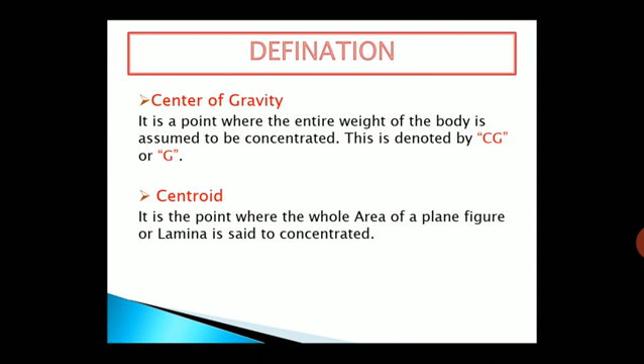So let's come to the axis of symmetry. In case of symmetrical figures like rectangle, square or circle, the figure can be divided into exactly equal portions along the axis, which is known as axis of symmetry. Yes, this is the axis which divides the figure into exact equal parts.

For example, if we take a rectangular paper and we want to cut the paper into two parts, what do we do? We fold it, and at the fold we cut that paper. So in this case the fold which we have made is nothing but the axis of symmetry, because along that fold when we cut we have two parts of the paper.

Secondly, I'll take a common example of a lemon. If we want to cut a lemon in the kitchen, we cut it such that we get two equal halves of the lemon. So the axis along which we are cutting is nothing but the axis of symmetry. So we can get two types of figures. One is which we have symmetry along both the axes.

Example, if I take a circle and draw a horizontal diameter, the diameter becomes a symmetrical axis, because if I cut along the diameter, I'll get two equal parts. Similarly, if I consider the vertical diameter as a symmetrical axis and cut along the vertical, again the circle is divided into two equal parts. So this is a completely symmetrical figure where along both the axes when we cut the figure, it results in equal halves.

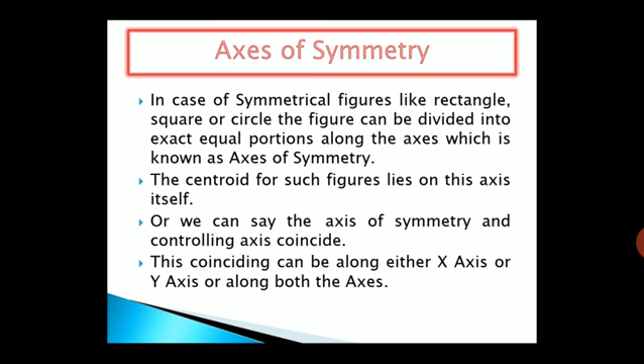Next comes the centroidal axis. It is that axis which passes through the centroid or center of gravity of the figure. Now for symmetrical figures, the centroidal axis and the axis of symmetry overlap because both are the same.

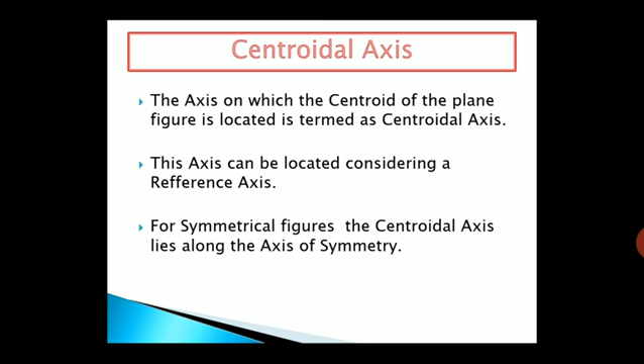Next is axis of reference. It is any general axis or standard axis which is taken as reference. Now we have our x-axis and y-axis which we use commonly while drawing a graph. They are reference axes. With respect to them, we can locate the centroid or center of gravity of a figure.

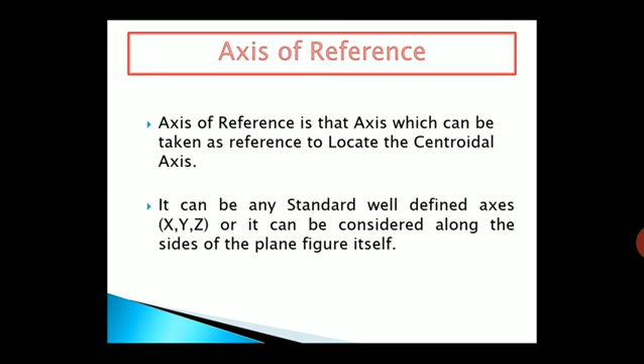Now this sketch here which I have put is just an example where we can recognize the different axes. Now your x and y axis are your standard axis, which are your axis of reference. Now CG, which is marked and shown in green color, is your centroidal axis.

Now the figure taken is rectangle in shape. That means it's a symmetrical figure about both vertical as well as horizontal axis. Hence, in this case, the axis of symmetry coincides with the centroidal axis. Okay, that means that both are same.

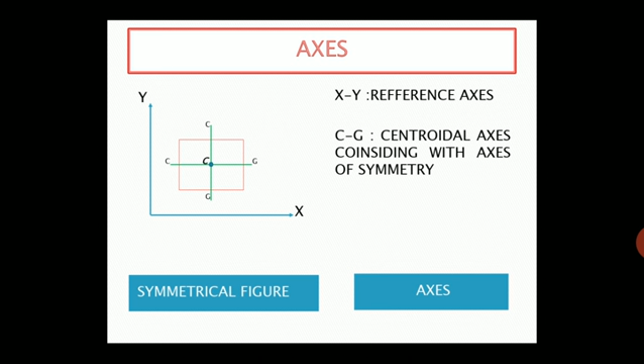So here if we want to locate the center of gravity, that is the C point which is shown on the figure, you can locate it with respect to x-axis, that is finding the vertical distance, which we term as y bar, or you can locate it with respect to y-axis also by finding the horizontal distance, which we term as x bar. So basically the coordinates of your centroid are x bar and y bar. Okay, so that is what we need to find in this chapter, locating CG of the given figures.

So now let's come to the formula by which we can locate the CG. For symmetrical figures it is very easy because the center itself is the CG. But when we have unsymmetrical figures or plane laminas, how can we locate the CG? This derivation will give you the idea for it.

Now let us consider a body which is having a total area capital A. Let x bar and y bar be the coordinates of the CG of the entire body. Okay, clear? Now let us divide that body into small elements, each of area say A1, A2, A3, so on up to An, such that their centroidal distances from the axis are x1, x2, x3, so on up to xn, and y1, y2, y3, so on up to yn.

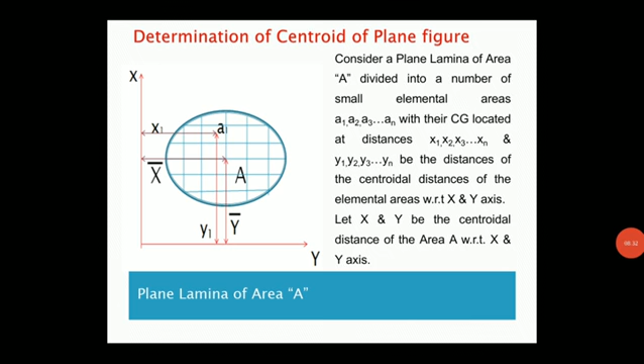That means the entire area A is divided into small elemental areas A1, A2, A3, such that if we add all the small elemental areas, we'll get the same area, capital A. Now, in this case, our task is to find x bar and y bar. So, applying the theorem of moments about y-axis and x-axis, we get A into x bar is equal to A1x1 plus A2x2 plus A3x3, so on up to Anxn.

Now what is this theorem of moments for an area? A is the entire area, whereas x bar is the centroidal distance of the entire area. So it can be written as what? We'll take an individual element and multiply it with the x value for that particular element. And when we do the summation of all that, the equation which we get is A into x bar, that is the total area multiplied by the centroidal distance, is equal to an individual area multiplied by its centroidal distance, and summation of such gives us x bar.

So in the below formula, if we cross multiply, summation of Ax is nothing but A1x1, A2x2, so on. A is shifted to the right hand side, it goes to the denominator, and we get the formula for x bar as summation of Ax divided by A, where summation of Ax is A1x1 plus A2x2 plus A3x3 and so on, whereas capital A is the summation of entire area or the total area.

Similarly, we'll get y bar as A into y bar is equal to summation of Ay, that is A1y1 plus A2y2 plus A3y3 so on, divided by A, which is the total area. Or if you want to write it in the form of integration, which we require to use during our derivations, we can write integration of x dA upon A is x bar, whereas integration of y dA upon A is y bar. Here what is dA? dA is an elemental area in x direction, and dA multiplied by y is the elemental area along the y direction. So the second integration formula which we have noted here is further used in the derivations. So this is an important relationship, please note it down.

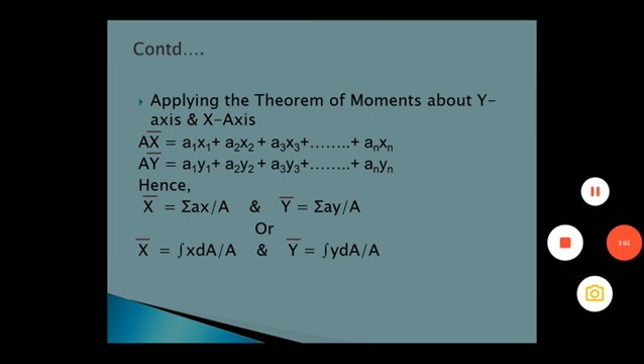Whereas now if you would have taken a rectangle instead of a triangle, rectangle is symmetrical about both the axes, therefore its centroid is itself the center. That is, if the height of the rectangle was h and width was b, then we would have got the centroid directly as b by 2 and h by 2. But here in case of this triangle, it is not that case, so we need to derive it.

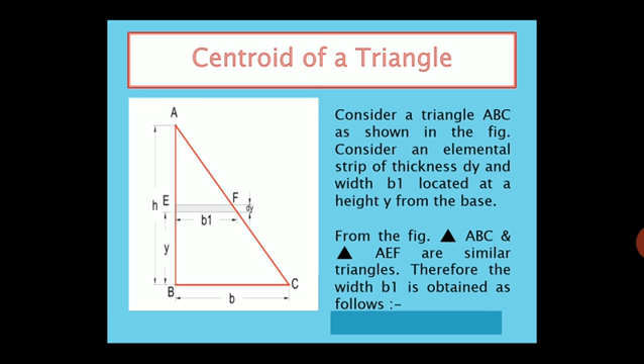So now here in this figure we get two triangles. One is our main triangle ABC, the second triangle is AEF, which we have got by taking an element which has a thickness or a depth of dy. Hope the figure is clear. It is straightforward. Then further, let's find the value of b1.

We'll use the principle of similar triangles. Make a note, here we are applying the principle of similar triangles. The two similar triangles considered here are AEF and ABC. So let us take the ratio of its sides. b1 upon b is equal to the height of the smaller triangle, h minus y, whereas the height of the bigger triangle is h. So by cross multiplication we get b1 as (1 minus y by h) into b. So this is the value of b1.

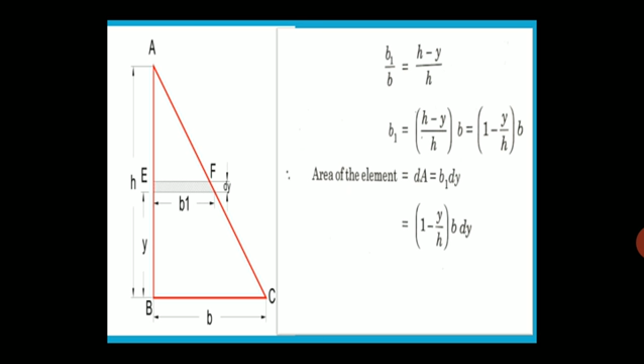Therefore, what will be the area of that element? As it is a very small element, let us consider it as a rectangle. The area of the rectangle is breadth into depth. Here breadth is b1 and the depth or thickness of that elemental strip is dy. Therefore, the area of the elemental strip, we are taking it as dA. dA is equal to b1 into dy. Substituting the b1 value we found, dA is (1 minus y by h) into b into dy.

Now the area of a triangle formula is half base into height. From the principle of moments, y bar is equal to integration of y into dA upon A, which we derived earlier. The A value we know directly, half base into height. So let us find integration of y into dA. As we have taken the strip horizontal, the limits will be from 0 to h. Substituting the value of dA and integrating it, we get the answer as bh square by 6.

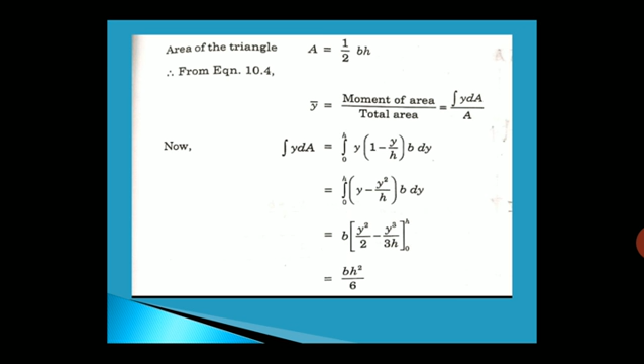Why we have taken h is we are locating the element in the horizontal direction and its height is taken with respect to the base of the triangle. Hence we are taking the variations along the height of the triangle, which varies from 0 at the base to h at the top, so our integration limits become 0 to h. Therefore, substituting, we get y bar is equal to bh square by 6 divided by the area. First we apply the limits 0 to h, then substitute and solve, and we get y bar as h by 3.

What does that mean? From the base of your triangle, y bar lies at a height of h by 3. For example, if the height of the triangle is 6 meters, your y bar, the centroid from the base, will lie at 6 divided by 3, which is 2 meters. Similarly, if you locate the centroid from the vertical side of the right angle triangle, it will come as b by 3, whereas from the base it will come as h by 3.

Therefore, the centroid of the triangle, you can write it as CG equal to x bar comma y bar. For x bar, when you derive similarly, you will get b by 3, and for y bar you will get h by 3. In the next class I will give you the other triangles or the formula list.